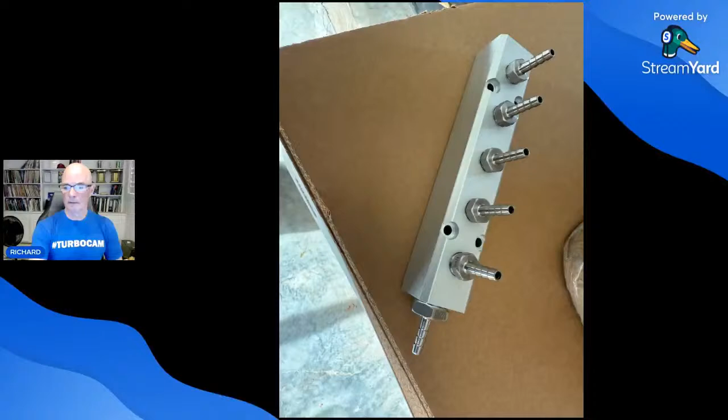Yeah, we're live. As you can see from the photo I have up here, we have our... I'm not sure what we're going to call them yet. Right now we're just calling them boost or vacuum logs. They're just trees basically with a bunch of fittings on them, a common source for the vacuum or boost from the manifold. The fitting that goes into it is much bigger, and then you can distribute it with various fittings that you screw into this thing.

And that way we can get... here, I'll show you what we got going on. This works very well. And I can't believe how long I have wanted one of these, and that I've never either built one or bought one or just got one from somewhere, because I have run hundreds and hundreds of motors on the dyno with boost on them.

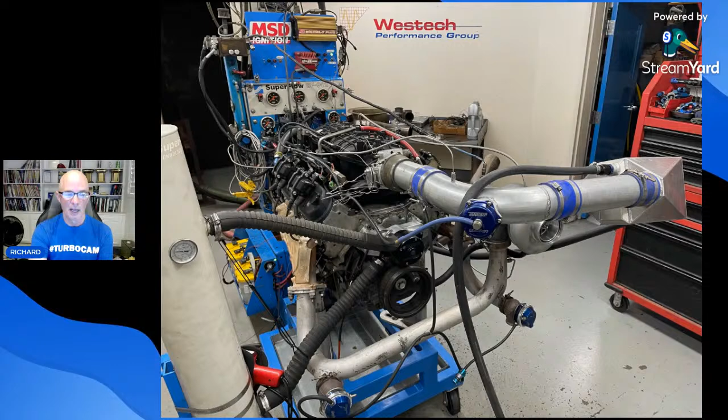And I always go through the same thing, I'll show you what I'm talking about. So here's a typical kind of setup, and you can see we have to have vacuum/boost lines running to lots of different stuff. In this case we have two wastegates, we have a boost controller - this one was a manual one, but you could also have an electronic one - we have a blow-off valve, we have the map sensor, we have the fuel pressure regulator if we're boost referencing the regulator.

And then you're also limited by the number of vacuum/boost fittings that you have on these manifolds, particularly factory ones, because that's a Trailblazer SS that we ran on the 5.3 and the 6.0, which is the next video coming out. I'm going to be comparing the 5.3 and the 6.0, both NA and under boost, with the same low buck truck camshaft, the same Trailblazer SS intake manifold, and both with one of our G42 turbos. You can see what the difference is NA, and we can talk about which one you would pick. That's coming up, that will be the next video. But you can see this menagerie of vacuum lines and fittings and stuff.

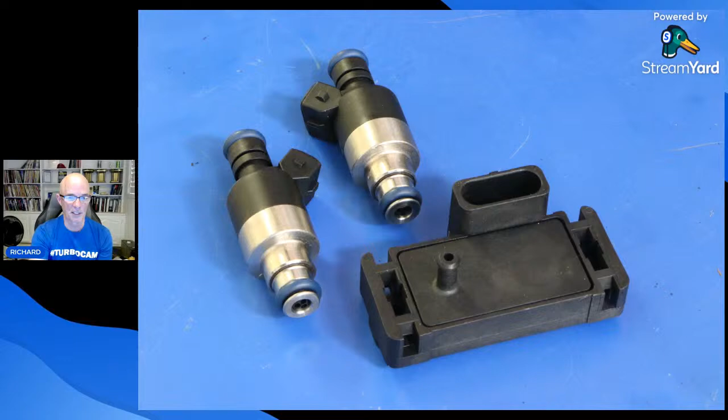Sometimes I can just adjust one and leave the other with a common reference to it. Sometimes I can run the reference to the top of it. I can juggle the wastegate situation, which is kind of cool. But like I said, these things go to map sensors, they go to wastegates, they go to the boost controller.

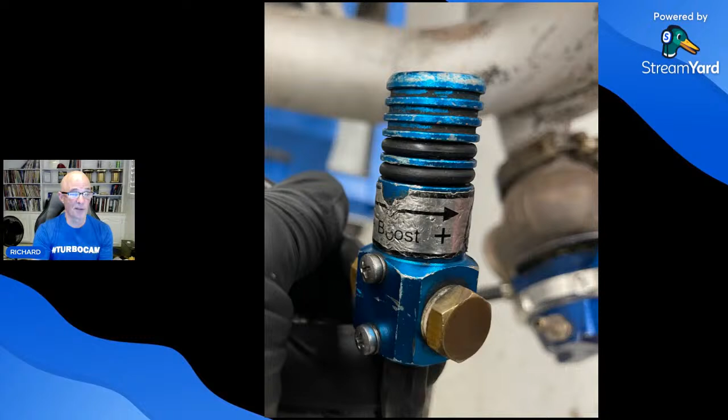All of that stuff takes some sort of source, you need vacuum. And the other thing that happens is, for instance, this piece is a good example. This is basically a bleed valve. It's, for lack of a better term, a controlled vacuum leak. And so you don't want a controlled vacuum leak when that's attached to something else, particularly the map sensor.

That would be bad. You don't want a controlled vacuum leak when it's teed off of the blow-off valve either. It's going to make the other things that rely on a dedicated boost vacuum source not function quite the same. The map sensor is the big no-no, but the others, it will affect as well.

So if you're going to do that with this kind of controller, anything that bleeds the boost or vacuum source out, this has a valve on it to stop that on the vacuum side. But anytime you're doing that, you want to have a true reading, especially to the map sensor.

But if you have a big opening and then a large fitting and then a big common vacuum plenum, as it were, in the setup, and then you're coming off of each one of those, the signal is going to be much better going individually, because it takes a lot to alter the signal with the length of line going into each one. So it works much better to have this kind of common log deal.

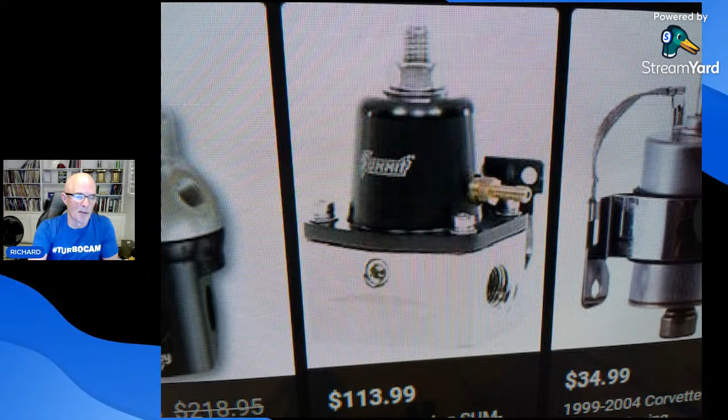And then the fuel pressure regulator, I just snatched a photo off the line, and this one's a Summit one, but you can see it's pretty typical. They all have a vacuum or boost reference to the top of the diaphragm.

That way, when you hit that with vacuum, it pulls the diaphragm up against the spring, so it lowers the fuel pressure. When you have boost going to it, it pushes down on the diaphragm and holds it closed longer, so it works with the spring pressure to increase the fuel pressure 1-to-1, given this volume and the size of the diaphragm under boost. So it works really good.

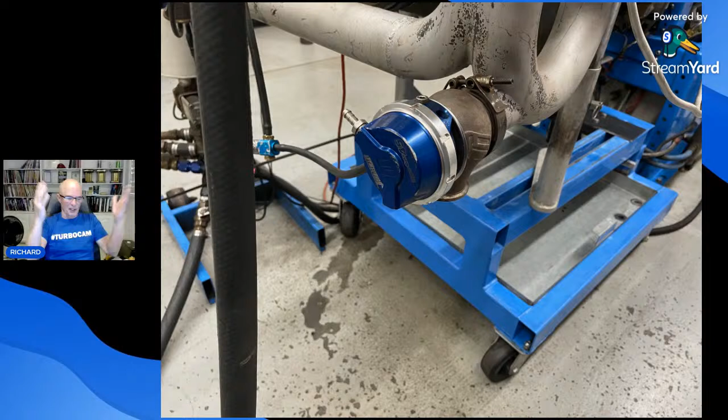The wastegates, and then, you know, there's also enough of these fittings to go to all of these different things. Some of them you can share, like I don't mind sharing the map sensor and the reference line going to the fuel pressure regulator. That's not going to leak at all, and so those are common ones. Those are usually the ones that I tee off of, so I'm not that concerned about that.

Let's see here, where's my photo at?

Down. Let's see what you guys got going on.

Billety goodness, we have distribution, that's right. It's about time that I had this. I know, I do like some billety good stuff. Yeah, you could polish that if you wanted to.

Danny, Rich, Jet, good morning. Wrexham. FIC 1000 injectors, Delphi adapters, Hellcat fuel pump with install. That kit you sell, is it just one injector or all 8? No, if we have an injector and pump, the injector and pump setup is all of the injectors and the pump.

Billety good stuff, just got on and saw this. Successful day, 12 more break-in miles on the Camaro. Heads, cam, intake, rear end upgrade, gears, and new clutch. Heading to the shop on Friday for tuning. Nice.

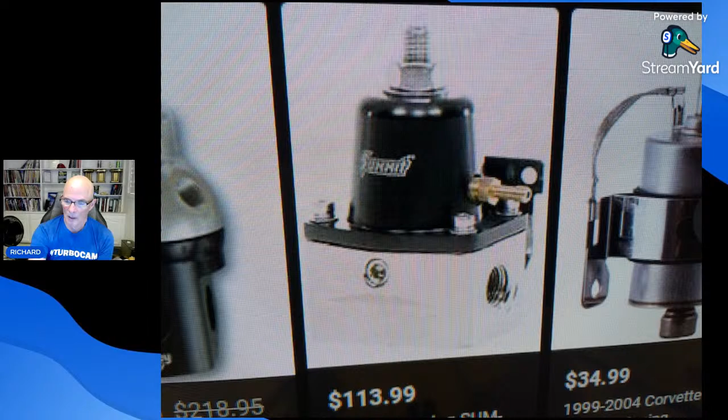I think I'm most excited about this. Can't wait to have that be the norm. Norm!

Rather than, hey, let me go through and, because every time you put a motor up, it shouldn't be like the first time that you ever put a motor up where you're searching around for everything. It should be like, look, we run lots of LSs here. But because of what I do, it's stuff like this that's weird and unusual, and it seems like doing the vacuum lines takes as long as putting the turbo stuff on.

Stage one's big injectors, further away from the valve. GM3.6 V6, direct injection, 11.3, stock cam. I'm putting a carb on it. Okay, like you would. 93 octane. Yeah, that should be fine.

It's a 2013 Malibu with hopefully just electrical issues. Test instead of parts cannon. Okay.

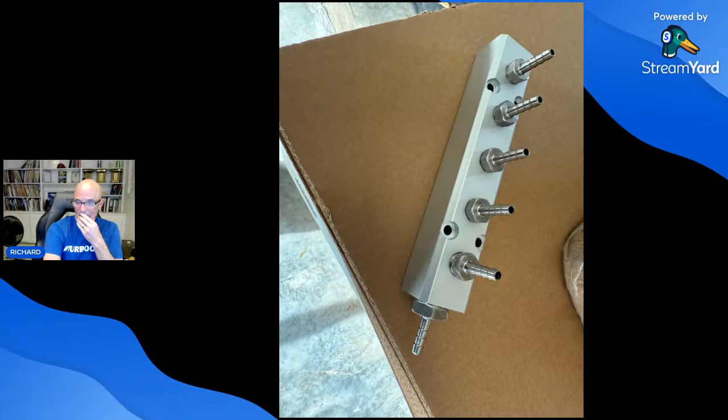Is that even possible? Just a flesh wound. I've bested you. No, you haven't. Come here, I'll bite your head off. Okay, well, got a draw. You're a loony. None shall pass.

Have you ever turbocharged an inline 6-cylinder? Yes, lots of them. The 292, for instance. The 4200, the Atlas motor. Various Nissans, L series. Don't some rotary guys run 2-stroke oil instead of the OEM system?

How do you tell if he's the king? That's right. Well, you're not my king. I didn't vote for you. Some tart in the lake lobs you a sword. That's the basis for government. Come see, what is it? Come see the violence inherent in the system. That's a dead giveaway.

Have you ever been so drunk that you dynoed a goat? No, not dynoed. Always had oil injection on my rotaries.

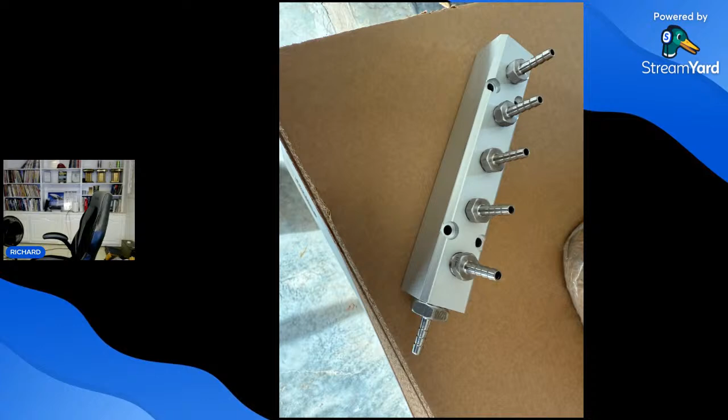I'm back, somebody was picking up a car. I was helping somebody out, I did some brakes. As it turned out, they didn't even need brakes. She thought that they needed brakes, so I was trying to help her out.

Weird question for everyone here: do you think there would be any demand for a vacuum canister that did timing retard like an old Corvair? You mean like the vacuum advance boost retard stuff they do on distributors, like on the Sprint? The one the Sprint had?

On the electric oil metering pump, you have to remove the chip off the ECU.

Bring out your dead, yeah, that's why they were making fun of it, because it was a real thing. You see Eric's latest video where he put the wrong pulley on the blower? I haven't seen it.

It's possible to get an LS 180 degrees at a time. Yes.

No, you said at the beginning you were running both a 5.3 and 6.0 with a G42. Can you run a single GTX 3584 also? I can't now, we've already run the test, but I can later.

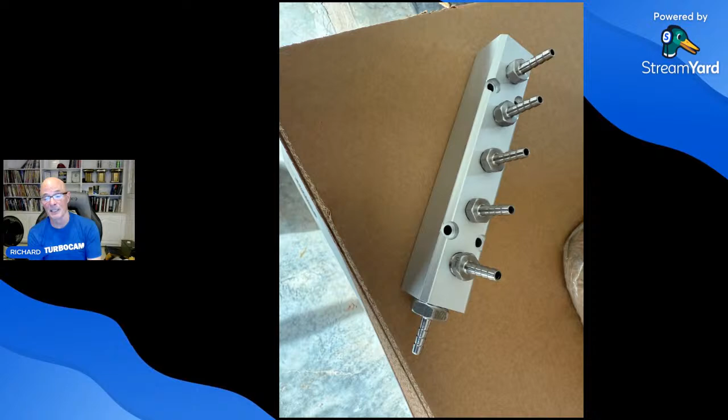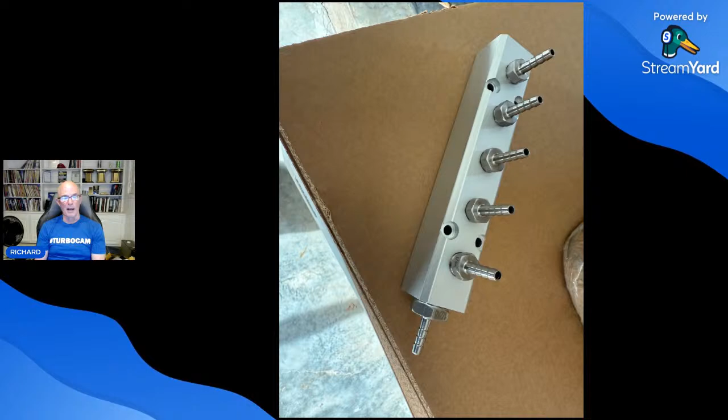Was the 11.8 to 1 compression nice for a big block running methanol? I don't think it needs to be that high for a blown big block, if that's the one you're talking about.

Richard, you questioned if I was trying to run 8 pounds of boost at 3,600 on the International. Yes, that's what I'm trying. The concern I have is that running boost at that RPM is fairly low, so you've got to make sure you have the timing right and take detonation into account.

Is a log manifold better than a Summit turbo manifold for a single turbo setup? Better for what? We've got to go back to solving your problem first. What are you trying to get done here? Have you ever tried twin turbos that have the same cold side but different hot sides? Yes, I've changed ARs if that's what you're asking.

The K24s have a weird reputation. They're considered a tractor engine by the K20 people, but the people that like them say they're super durable.

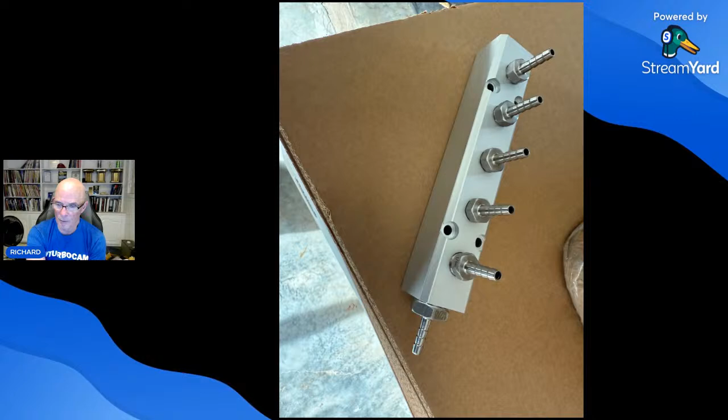Or my first methanol dragster. No, a complete motor.

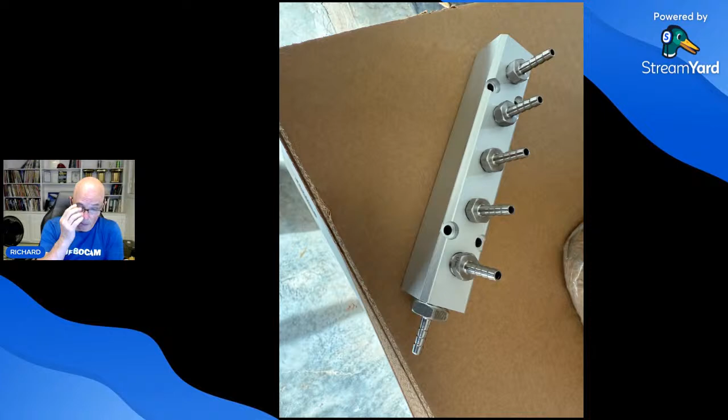What's the best stock cam for low end? The one that makes the most power at 2000 RPM is an LM7 LS cam.

No, I'm not interested in somebody sending me a motor, but thank you for the offer.

I want to spool fast on a 6-liter. Yeah, I don't think that's going to be a problem.

Spend the extra money, Brian. I think you're worried about the wrong thing. I would be more concerned about fitment than about which turbo system is going to work best. The turbo is going to dictate the power. So you have a motor, you have a turbo—the exhaust is the least of my worries.

My advice to anyone with difficult to diagnose issues is to use something like a PicoScope.

I thought it was a Gen 4 6-liter 5-bar map sensor. Yeah, I thought he said it was a 6-liter.

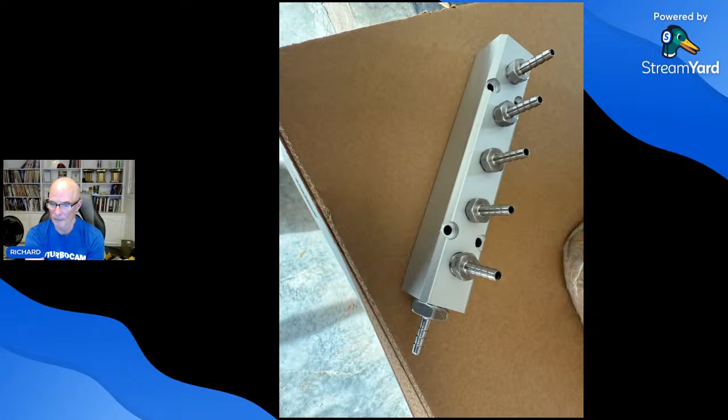I've been trying to replicate that test, but I can't find any dyno shop willing to let you do that. You can't find somebody willing to let you run a twin turbo 6-liter on something?

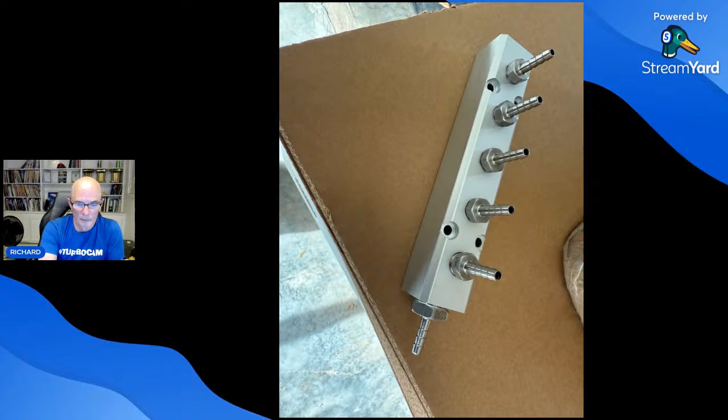The twin 70s spool fairly quickly. I don't know which ones they are, so I can't say for sure. I'd have to know more about exactly what turbos they are, and really I'd have to test them to see how well they work, because there's a big variance between one 70 and another 70.

The 454 is probably seized mains. I've seen a lot of big blocks that aren't oiled properly. Yeah, it could have welded itself, I guess. You see when the thrust goes out on those—but if the gentleman's asking about the big block, if you can drain the oil, does it have a bunch of bearing material in it?

We're going to go with a Huron Speed hot side kit. Yeah, just pick something that fits and hopefully will last and doesn't leak. But I don't remember what kind of power you're trying to make, Brian. Were you trying to make a lot?

The stock truck manifolds work really good. You can make a lot of power with those—four-digit power even. I don't remember if you were trying to make 1500 or what the deal was.

Oh, all that glitters is not gold. Yeah, not with bearing stuff.

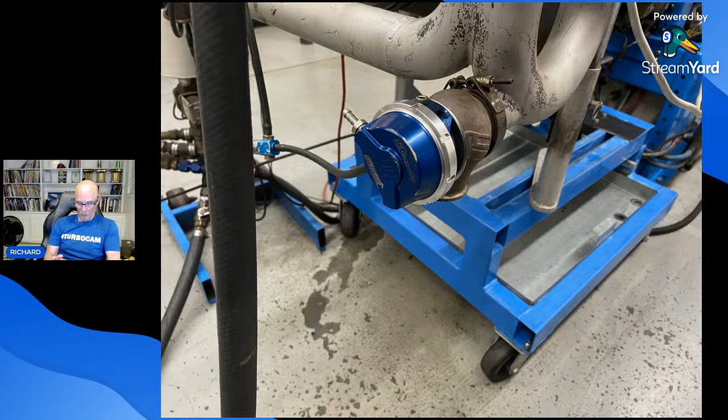So, is the NA motor making 480 at the tire?

Do you have any 300 Ford parts? I've never run a 300 Ford.

Texas Speed Cam, I'm not familiar with that. I don't know what the specs are.

Would it be crazy to mount a ZX14R in a shifter kart? No, that would be cool. It'd be a handful. A 240 horsepower one would be pretty pissed off.

Have you messed with the 6014 box? Yeah, we'd run the MSD stuff a lot.

Look at the dyno sheet. Looks more like converter flash. I don't know if the hub dyno has problems calculating converter flash where the chassis dyno did not. The converter is still going to act up even on a chassis dyno, even though the wheels aren't slipping and the dyno rollers aren't slipping. So the hub dyno would be the same thing. What's happening is the RPM is jumping up relative to wheel speed, and so you get a weird reading.

What's the ideal cam size to run a single turbo 6-liter and maintain low end power? What is your desired power output, Cameron? Did you tell me? I don't remember.

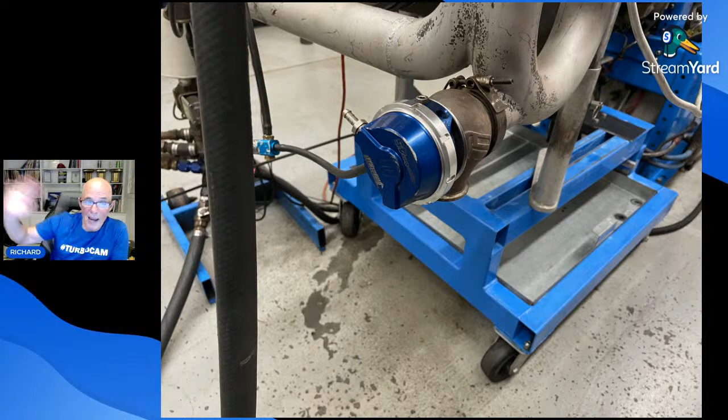I can tell you we can make way more than 1,000 horsepower with a 5.3, that L33, and a low buck truck camshaft. That's the camshaft I recommend to almost everybody. Even on a 6-liter, that camshaft will easily get into the 4-digit power level. That's all the turbo. So on our test when we ran the 5.3, we ran it with the low buck truck camshaft, put the G42 turbo on there, only ran 15 pounds, and it made 920 or something like that. So the camshaft is not going to dictate the power, the turbo is going to do that.

550 wheel, 600 wheel won't quick spool on the street. Have a T56. Okay, on a 6 liter.

For 600 wheel horsepower, I would put the smaller of the two turbos that we have. I would pick a small cam like the low buck truck camshaft, and I would pick the GTX 3584.